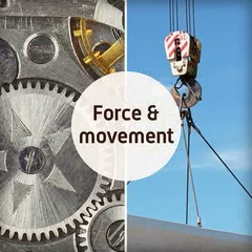Mechanical components create mechanisms that generate force and movement within a product. They can be small and precise as in a watch, or large and powerful as in a crane. All mechanical systems have mechanisms that transform an input motion into an output motion.

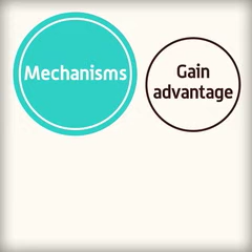Mechanisms are designed so that you can gain advantage from using them, making it easier for you to do a task, and some mechanisms can even change one type of motion into another. Linear motion is a movement one way in a straight line, for example, a sliding door, and rotary motion is moving in a circle, for example, a helicopter blade.

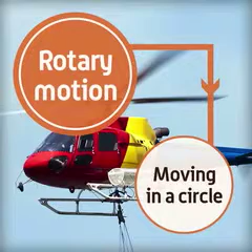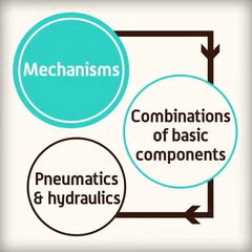Reciprocating motion is movement backwards and forwards, as in a jigsaw or piston, and oscillating motion is swinging in alternate directions, for example, a pendulum in a grandfather clock. Nearly all mechanisms consist of combinations of basic components and can include pneumatics and hydraulics. The basic components include levers, linkages, pulleys, chain and sprockets, gears, cams and cranks.

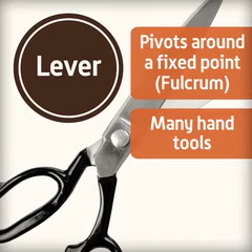Mechanisms can help move heavy loads by amplifying a smaller force. A lever pivots around a fixed point, which is also known as a fulcrum or pivot. Look at the hand tools in the workshop. Many of them are designed on a lever principle and can be used to increase force. An example of this is a pair of scissors which work by two levers, the blades pivoting around the fixed point at the base of the handle.

Linkages connect different parts of a mechanism together and are used to transfer motion. Simple linkages often use levers to change direction or to multiply force. Think about lifting a heavy rock. What if you had to lift it on your own? Using a pulley system allows you to lift a heavy load using a system of cables, ropes, and pulleys, making heavy weights feel lighter than they really are.

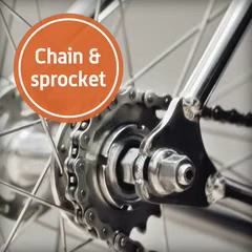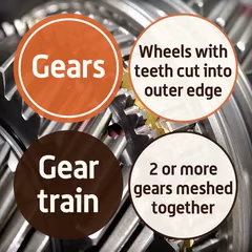Do you remember learning how to ride a bike? A bicycle is a great example of a chain and sprocket mechanism, which works in the same way as a pulley system. They transfer movement, but with less risk of slippage. Most GCSE students aren't old enough to drive yet, but you can dream of gears. Gears are the wheels with teeth cut into their outer edge, and a gear train is when two or more gears are meshed together. Some gears can change the type of direction or motion.

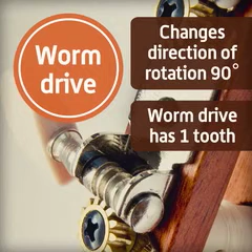Rack and pinion gears are used to turn rotary motion into linear motion. A worm drive and a worm wheel change the direction of rotation by 90 degrees, as the worm drive only has one tooth and will turn much faster than the worm wheel. This method is used to tune guitar strings. Bevel gears change the direction of the rotation by 90 degrees as the teeth on the wheels are each angled at 45 degrees, so the gears mesh at right angles.

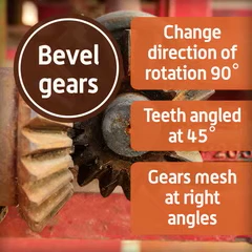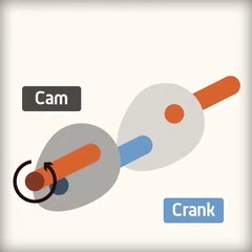The last type of mechanism to look at is cams and cranks. Cams are wheels which have a shaped profile. A follower runs around the edge of the cam and makes a reciprocating motion. The motion can be changed by using a different shaped cam. Cranks are the shafts that are stepped along the lengths of the cams by connecting a rod, and a reciprocating motion will be produced by a rotary motion. This motion can work in reverse if it is driven by a piston.

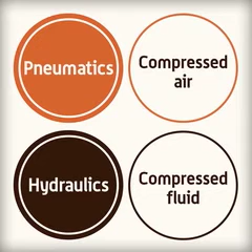Pneumatics, the use of compressed air, and hydraulics, the use of compressed fluid, are technologies that are often used with mechanical systems. Pneumatic systems use the potential energy stored in compressed air by controlling the release of the air. The energy can be turned into movement. An example of this is a dentist drill, which is lighter and faster than an electric drill.

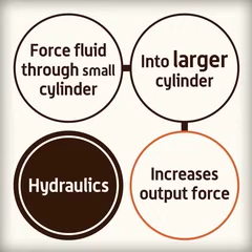Hydraulics involves forcing a fluid through a small cylinder into a large cylinder, which increases the output force. Combining this with levers creates a very capable machine, which is often used on the arms of mechanical diggers.